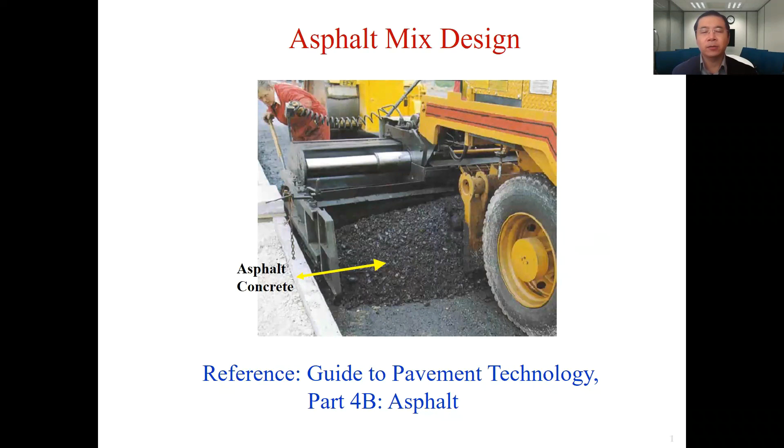From this week, I will deliver lectures for the second half of this pavement materials and design unit. I'm going to talk about asphalt mix design, design of the flexible and rigid pavement, and finally, the pavement maintenance. Today's lecture is about asphalt mix design.

Now let's have a look at two important types of pavement structure: flexible pavement and rigid pavement. Flexible pavement is normally composed of a wearing surface, a base, a subbase, and subgrade. The wearing surface, the top layer, is in direct contact with the traffic. It is normally made of asphalt concrete or bituminous concrete. Asphalt mix design is the design of the asphalt concrete wearing course. It is specifically designed to resist abrasion from traffic and to minimize the entry of water. The asphalt wearing surface must also have suitable surface friction properties for adequate skid resistance.

Rigid pavement is normally composed of cement concrete, subbase, and subgrade. We will focus on the asphalt mix design of the flexible pavement in this lecture and discuss rigid pavement in the following lectures.

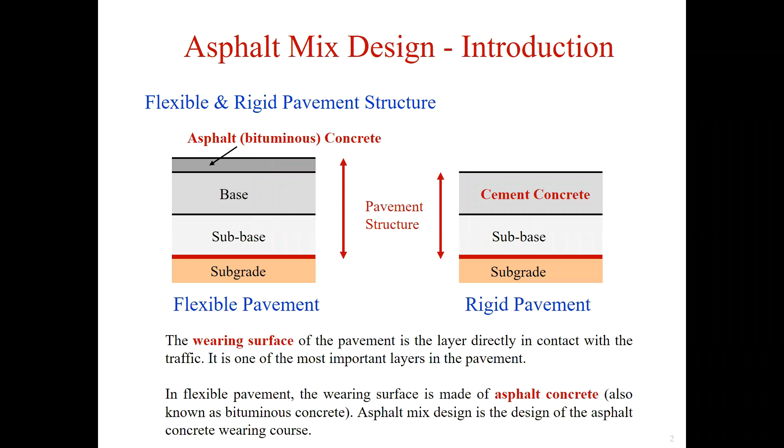For asphalt mix design, normally the guidelines and specifications need to be followed. In Australia, the asphalt mix design is based on the procedures contained in the guidelines of the Australian Asphalt Pavement Association, AAPA, and Australian Road Research Board, ARRB. These guidelines aim to promote good practice in the process of asphalt mix design and improved understanding of the selection of design procedures for particular applications.

In basic terms, asphalt is a mixture of coarse and fine aggregates, mineral filler, and bituminous binder. The asphalt mix design involves the selection of aggregate type and grading, the binder type, and binder content. The aim is to optimize the engineering properties of the asphalt to achieve the required engineering behavior. The basic requirements for asphalt are adequate load carrying capacity, or resistance to deformation, and durability. Specific requirements vary considerably with traffic loading levels, operating environment, and underlying base conditions.

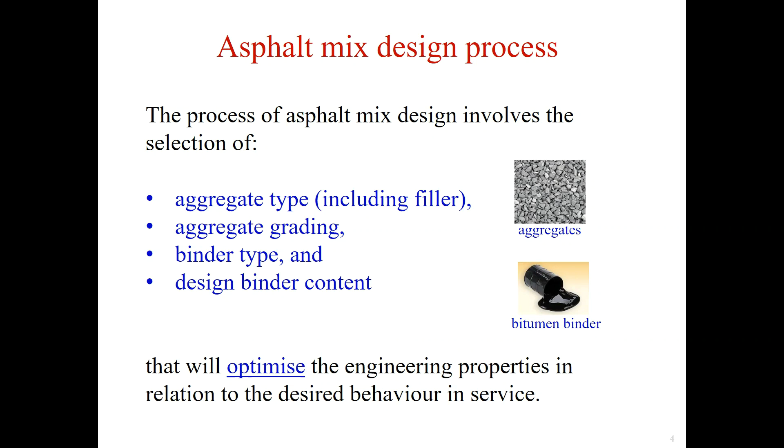For asphalt mix design, certain performance-based design criteria must be met. Here we have key performance indicators: deformation resistance, fatigue resistance, durability, and moisture sensitivity, which will be discussed in detail in the next slide.

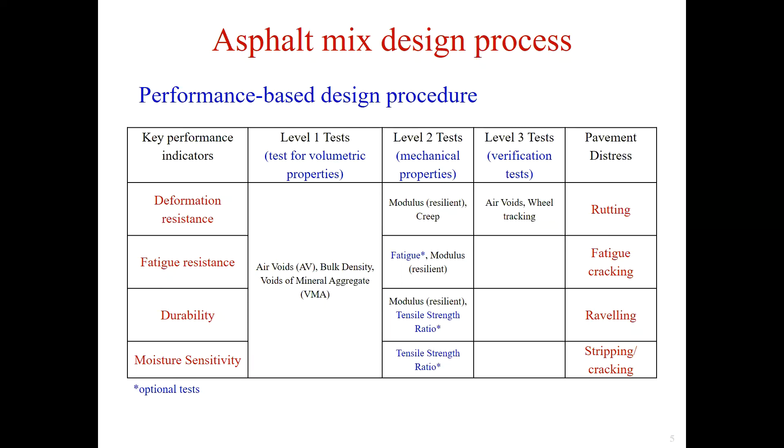There are three levels of tests. Level 1 tests are for checking the volumetric properties. Level 2 tests are for obtaining mechanical properties, while level 3 tests are verification tests. If these key performance indicators could not be met, then different types of pavement distress would occur, like rutting, fatigue cracking, raveling, and stripping.

Now let's go back to see these performance indicators and corresponding distress. If there's no sufficient deformation resistance, then rutting would occur, which shows surface depression in the wheel path. One of the main reasons of rutting is improper mix design or manufacture. For example, excessively high asphalt content, excessive inert filler, or insufficient amount of angular aggregate particles.

There is also fatigue cracking due to insufficient fatigue resistance. By the way, fatigue is the weakening of a material caused by cyclic loading that results in progressive and localized structural damage and the growth of cracks. The fatigue behavior of an asphalt layer depends not only on the properties of the mix, but also on the structural properties of the underlying pavement layers, the traffic, and climate conditions.

Durability and moisture sensitivity are another two performance indicators, and the corresponding issues are raveling and stripping of the wearing surface. Raveling is the progressive disintegration of a pavement surface through loss of both binder and aggregate. Asphalt stripping is essentially asphalt raveling in reverse. So instead of the surface coming apart, disintegrating and exposing the lower layers, the asphalt falls apart first and damages the upper layers.

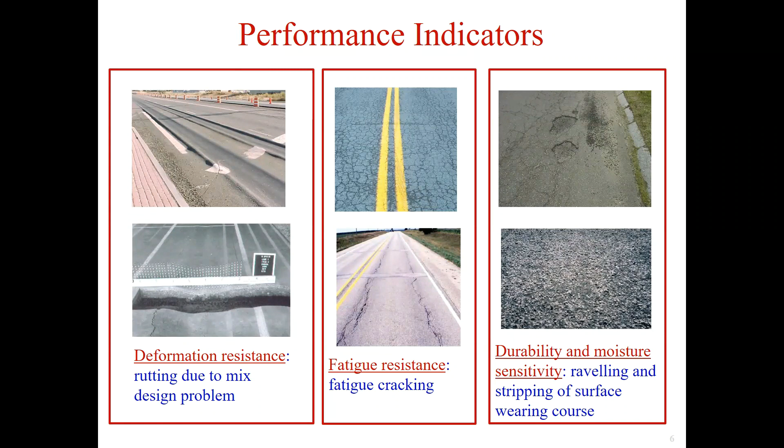Asphalt mix design involves the following 9 steps. Initially, we need to select the mix type, then the component materials. Selection of mix type for particular performance conditions will set the parameters for aggregate grading, the binder type, volumetric properties, and the general performance characteristics of the mix.

Afterwards is combining aggregates to meet target grading. Then select trial binder content and range, and mix, condition, and compact asphalt mix to simulate field condition. The 6th step is to determine the volumetric properties of the compacted mix and select design bitumen content.

Step 2 to 6 belongs to level 1 testing. Step 7 is the mechanical testing, or level 2 testing. Step 8 is the verification test, or level 3 test, to check the air voids or wheel tracking results of the asphalt samples.

Finally, step 9 is the selection of job mix. The job mix will nominate the type and source of components, target grading, the binder content, and volumetric properties of the mix.

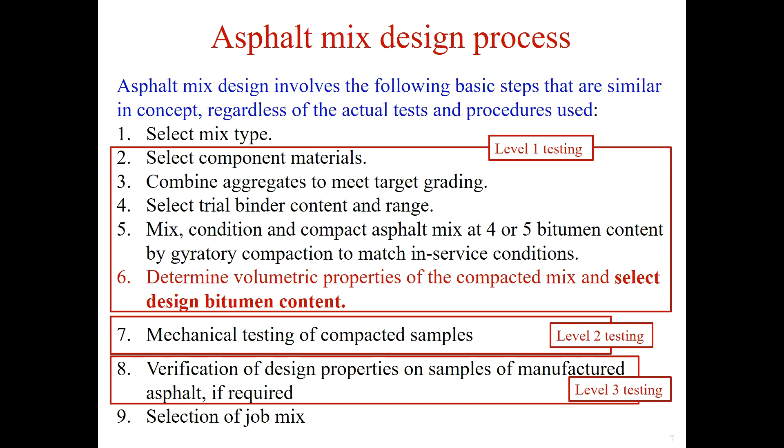This is the flow chart of the 3 levels of the Austroads mix design procedure. We will go through the details of this design process in the following part of this lecture.

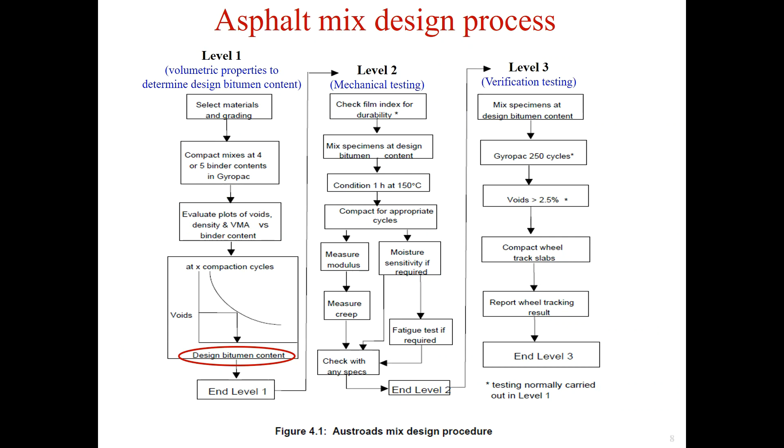Now let's have a look at the details of each slide.

In basic terms, asphalt is a mixture of coarse and fine aggregates, the filler, and bituminous binder. There are mainly 4 asphalt types: dense graded, open graded, stone mastic, and fine gap graded. The most common type of asphalt is a dense graded mixture. This is the focus of our lecture.

A dense graded asphalt mix has a continuous distribution of aggregate particle size and filler, and a low design air void content, generally in the range of 3 to 7%.

The open graded asphalt is characterized by a large proportion of coarse aggregates and only small amounts of fine aggregate and filler. Due to large voids, its usage can lead to reduced noise and reduced surface water and spraying.

The stone mastic asphalt is also a gap graded mix, but with a high proportion of coarse aggregate, providing an interlocking stone-on-stone skeleton that resists permanent deformation. Generally, it has high durability and high rut resistance.

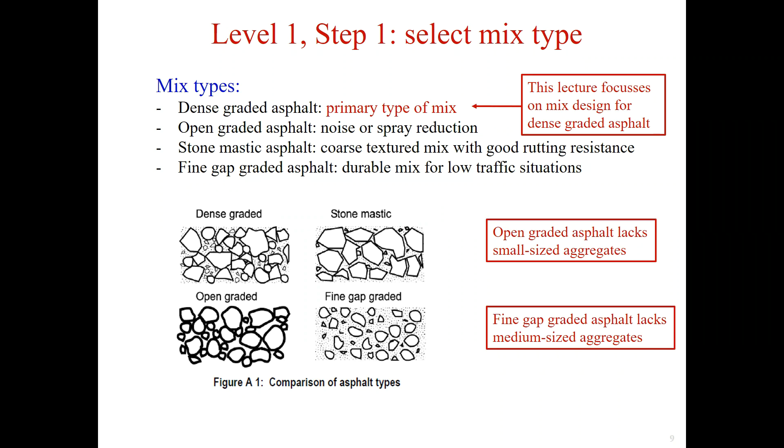The dense graded asphalt is most popular used in the field. It could be used for strengthening or correcting irregularities, or even fixing an existing pavement, constructing a new pavement, or improving the surface properties and the wearing surface of existing and new pavements. So surely this dense graded asphalt has multiple applications, and it is the main focus of our unit.

The other mix types, like open graded, stone mastic, and fine gap graded asphalt, are mainly used for the pavement to meet any special requirement.

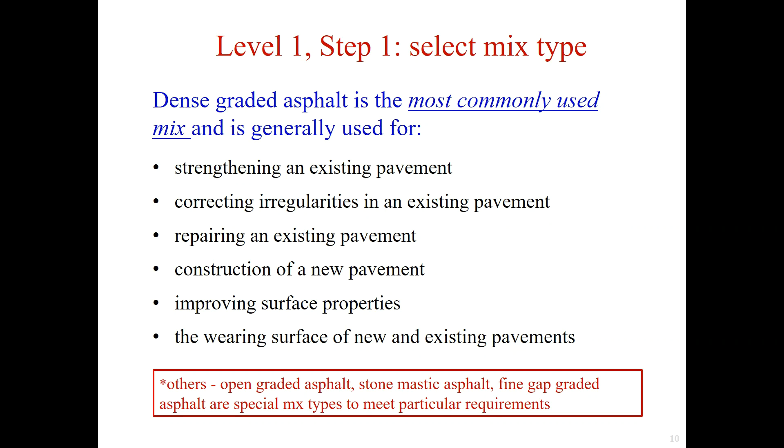Step 2 is to select component materials. The principal factors influencing the performance characteristics of asphalt mixes are the selection and quality of components and the volumetric properties of the mix, like nominal size, the grading, the binder content, and void relationships.

The selection for binder depends on the environmental conditions, such as temperature and traffic, and property requirement of the asphalt. The binders for asphalt manufacture mainly contain two groups: the conventional and modified bitumen binders. There are two types of modified bitumen binders: the multi-grade binder and polymer modified binder. Now let's look at the details of each type of the binder.

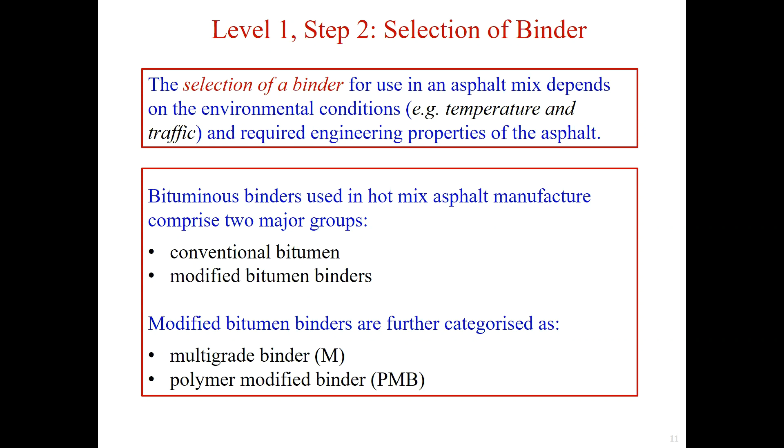The most commonly used bituminous binder in Australia is the conventional bitumen. According to its viscosity at 60 degrees, the conventional bitumen could be divided into three major grades: class 170, class 320, and class 600. By the way, the viscosity of the bitumen is a measure of its resistance to deformation at a given rate.

The softer grade, like class 170, is good at resisting fatigue and cracking due to its flexibility and durability. So it is typically used for light traffic and in cool climates.

The harder grade, like class 600, is good at resisting rutting or deformation of the pavement, so it is generally used for pavement with heavy duty. The medium grade class 320 has good resistance to rutting while maintaining flexibility and durability, so it is the most versatile and commonly used type of binder.

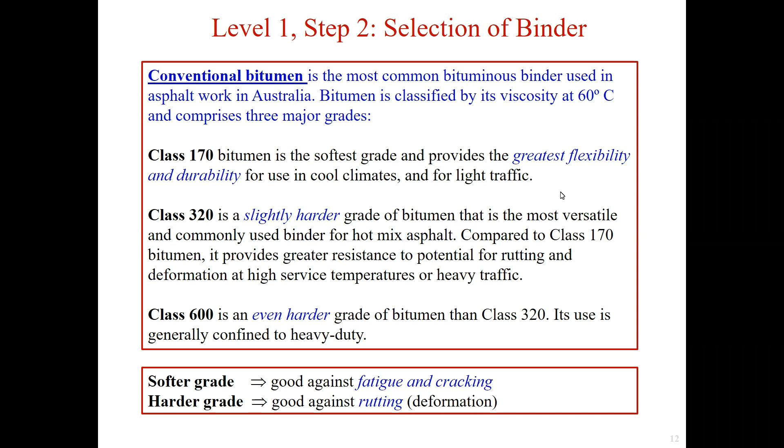Now let's look at the modified bitumen binder. Compared to standard bitumen grades, the multi-grade bitumen is less susceptible to temperature change, so it can provide improved deformation resistance at high surface temperature, while retaining the desired level of flexibility at low temperature.

The polymer modified binder is adding the polymer to increase binder toughness and elasticity. Toughness is the ability of a material to absorb energy and plastically deform without fracturing.

The polymer modified binders are normally used to enhance the properties of bituminous binders, to improve performance on heavily trafficked pavement surfaces, or provide greater flexibility. Its good performance includes improved flexibility, cohesion, and resistance to deformation of asphalt mix at high temperature.

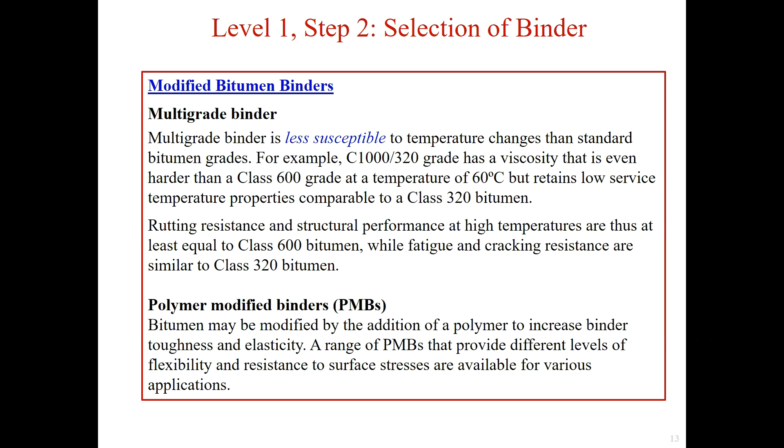According to different application purposes and different climates in the area, we can choose different types of binder, from class 170 to class 320, and either multi-grade binder or polymer modified binder. For example, if it is intended to be used for residential driveways in a moderate climate, then we need to use C170 or C320 as binder material.

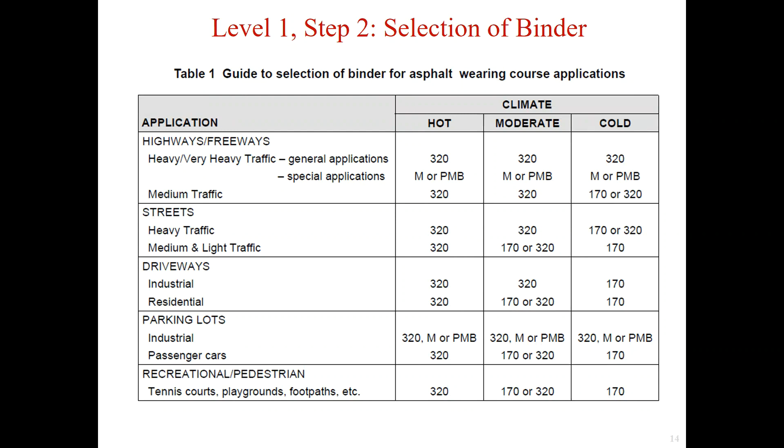We already learned the selection of binder in step 2. For step 2, we also need to select the aggregates. The nominal size of the aggregate could be determined as a function of the layer thickness, or the layer thickness could be selected on the basis of the nominal size required for a particular application.

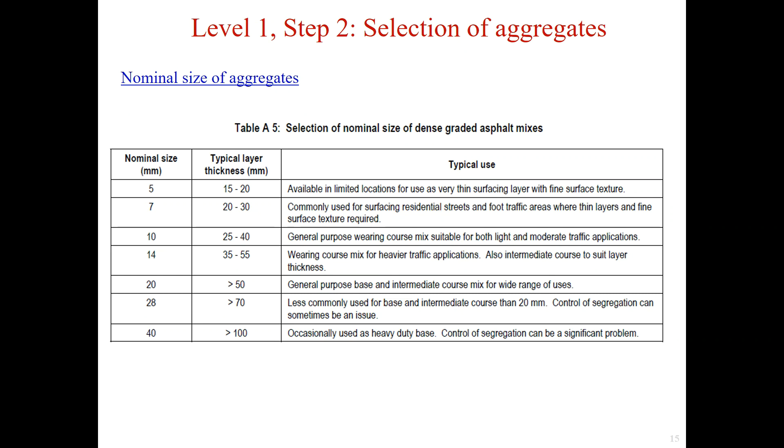A guide to selection of layer thickness and nominal size is shown in the table here. For example, if the nominal size of the dense graded asphalt mix is 40 millimeter, then the layer thickness has to be greater than 100 millimeter.

Step 3 is to combine aggregates to meet target grading. The target grading has to meet the grading envelope requirement. In general, the grading envelope is the particle size distribution of the aggregate.

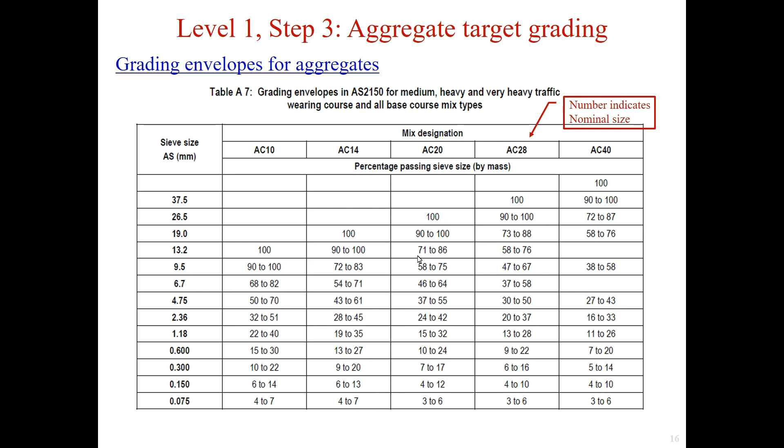When we plot the data in log scale, where the horizontal axis is the sieve size in log scale, and the vertical axis is the percentage of passing, here is how the grading envelope looks like.

According to the previous table, for AC14, we could plot the upper bound and lower bound curve, and normally the target grading falls in between them.

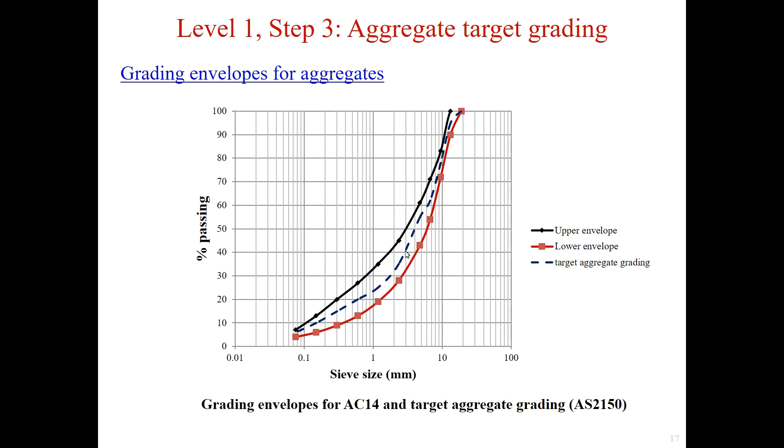A target grading may also be chosen from empirical formula. Most engineers will work from standard grading curves, such as those given in the previous table. It is possible to work from a design formula, such as that of Fuller and Thompson equation.

So P equals 100 times D divided by capital D to the power of N. In this formula, capital P is the total percentage passing a given size. If we know the size of the sieve D, the maximum particle size capital D, and the exponent, it could be taken as the value in between 0.4 and 0.7 to stand for boundary values.

Then the percentage by mass of aggregate passing a given sieve, capital P, could be calculated. This equation produces the maximum particle density when we take N as 0.5.

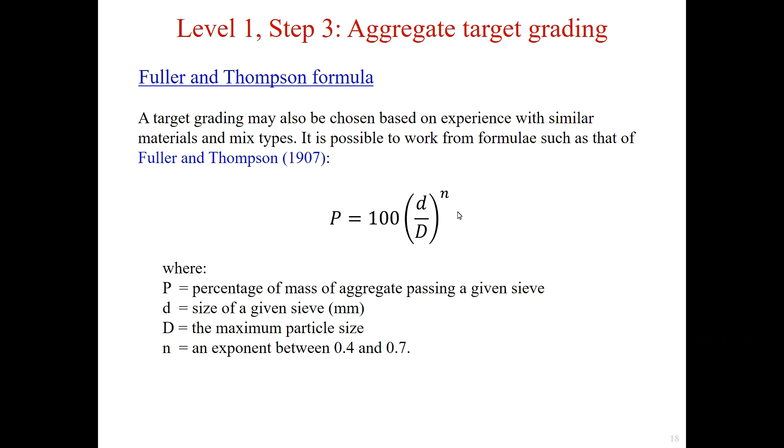In this unit, we have the opportunity to conduct lab testing on pavement materials. If you have done the lab testing, then here is the lab sheet you need to fill in.

You could use the Fuller and Thompson formula to calculate the target grading, and then work out the values for all three samples with bitumen content of 4% to 6%. We will practice one example by the end of this lecture.

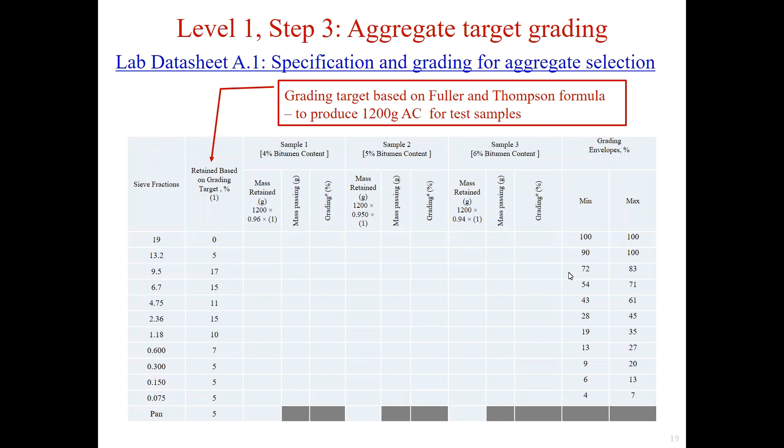We could also work out the proportion of combined coarse aggregate PC, the proportion of combined fine aggregate PF, proportion of filler PFill, and bitumen content capital B. Be aware that PC is for coarse aggregate with particle size equal or greater than 4.75 millimeter.

PF is for fine aggregate with size less than 4.75 millimeter but equal or greater than 75 micrometer, and PFill is for filler with size less than 75 micrometer.

For example, for sample 1, the bitumen could be calculated as the total mass of 1,200 grams times 4%, and we get the value of 48 grams.

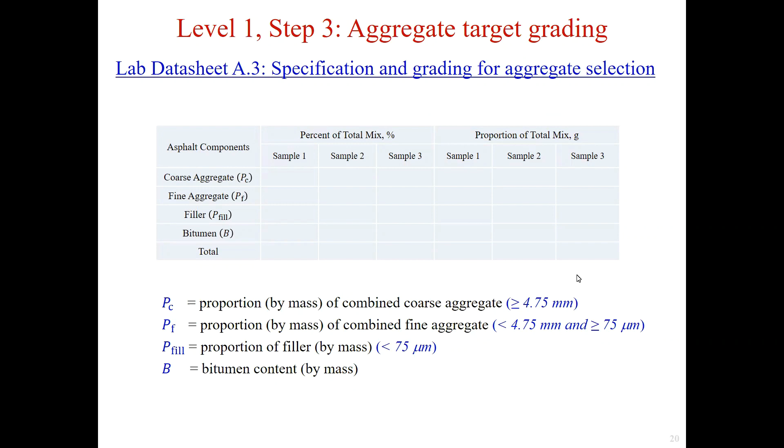Next step is to select a trial binder content on the basis of past experience, or to make sure to meet the requirement of minimum binder film index of 7.5 micrometer or greater.

The binder film index is a measure of the average binder film on the aggregate particles, excluding any binder which might be absorbed by the aggregate. This allows the mix to have adequate durability and fatigue resistance.

Normally, the binder film index gives the minimum binder content, and the trial binder content will normally be 0.5% higher than this. By using the trial bitumen content and the trial plus and minus 0.5% and 1%, we're able to get a range of bitumen contents.

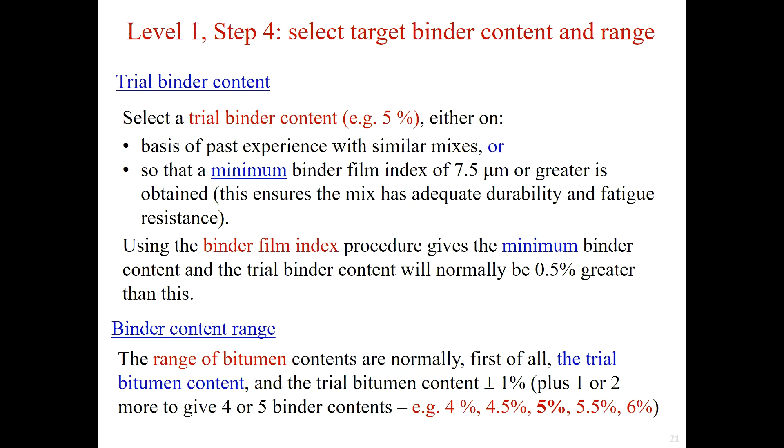Once the trial binder content is chosen, we start to mix and then condition and compact the asphalt mix in step 5. We need to ensure the sample prepared in the lab has properties as close as possible to asphalt placed in the road, and this is an important aim of the asphalt mix design procedure.

As discussed before, class 320 bitumen is commonly used in asphalt for medium and heavily trafficked mixes, so we will choose it for mixing. The mixing is conducted for a range of bitumen content, normally between 4% and 6%.

The aggregate and binder are heated in an oven and mixed at 150 degrees. The mix is then transferred to an oven and conditioned under 150 degrees for 1 hour.

It simulates the hardening of the binder during manufacture, placing of the mix, and the initial service period. In such case, the prepared sample could reflect the real behavior of the field pavement.

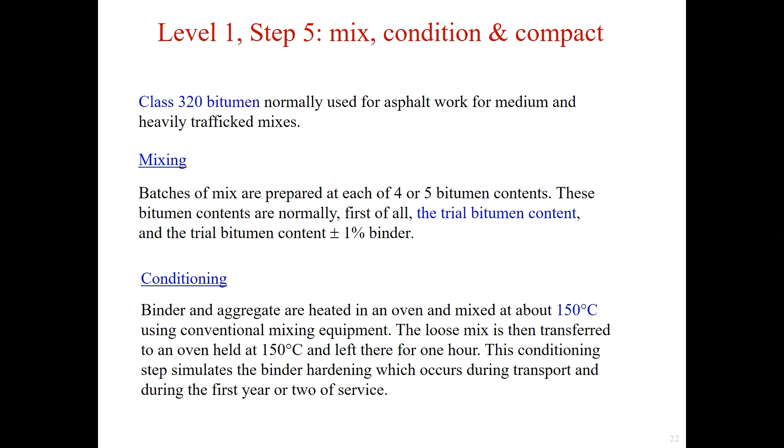For the compaction of the sample, the gyratory compactor is used to compact the samples for the required number of cycles. The compactor could produce 100 millimeter and 150 millimeter diameter cylindrical asphalt samples of specified density.

The applied shear force to the asphalt mix is similar to that from the roller during the construction of the road.

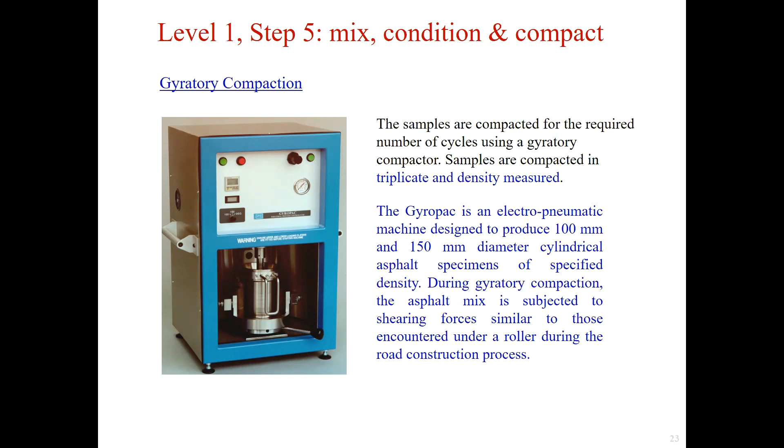So the vertical compressive pressure is applied to the asphalt sample within the mold. The produced samples have mixed characteristics very close to those found in the field pavement.

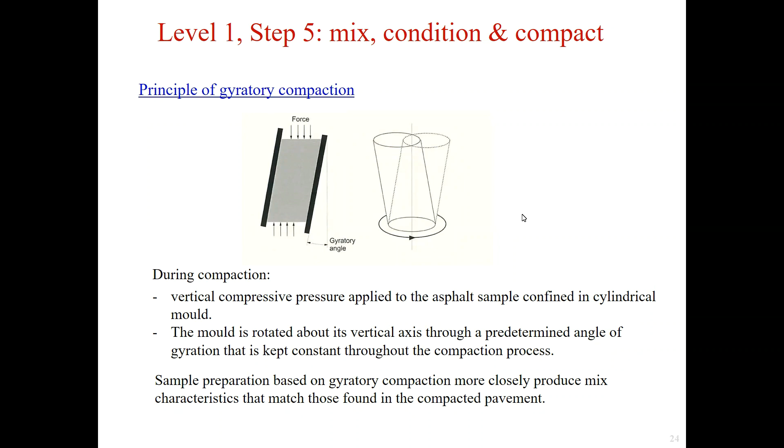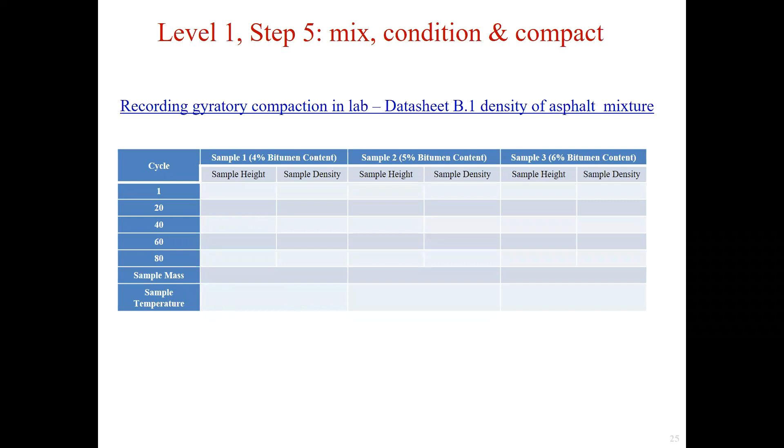Step 6 is to determine the volumetric properties to select design bitumen content. Let's have a look at the volumetric relationship.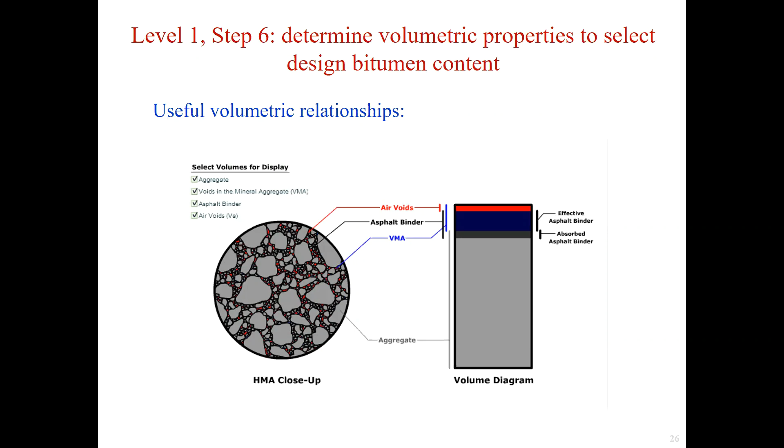If the relationship is expressed in terms of mass or volume, here's how the composition looks. If we look at mass, normally the air voids have no weight. The binder is expressed as capital B, BE stands for the effective binder, and small b for absorbed binder.

From a volume point of view, AV is the volume of air voids, and VB is the effective volume of the bitumen. The sum of them is called VMA, the voids in mineral aggregate. Typical values of VMA in dense mixes can be 13% to 20%, depending on the nominal size of the mix.

Finally, Vg is the volume of the aggregate, including the absorbed binder. I would strongly suggest you pay more attention to these definitions and relationships, as you'll need to use them for some calculations.

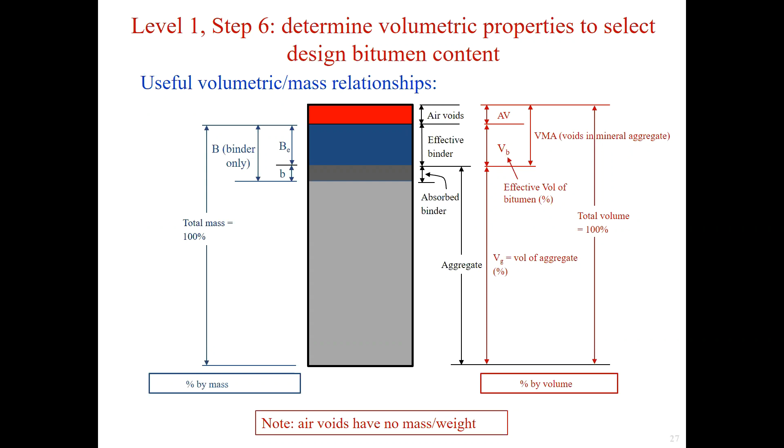Based on the previous figure, we have the following useful volumetric relationships for air void content AV, voids in mineral aggregate VMA, and voids filled with binder VFB. Among these formulas, rho max is the maximum density of asphalt in tons per cubic meter.

The rho bulk is the bulk density of asphalt in tons per cubic meter. Capital B is the proportion by mass of binder in total mix. Rho B is the density of binder in tons per cubic meter. Finally, rho A is the bulk density of the combined mineral aggregates in tons per cubic meter.

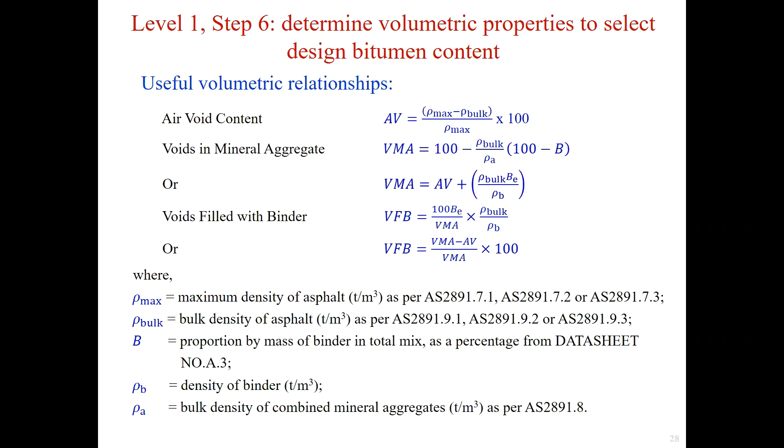This is the follow-up of the previous slide. The bulk density of the combined mineral aggregates could be calculated using this formula. The physical meaning of each symbol is shown below.

BE is the proportion by mass of the effective binder as a percentage, which can be obtained from the following equation. The small b is the proportion by mass of the binder absorbed as a percentage. It could be calculated from the bottom equation.

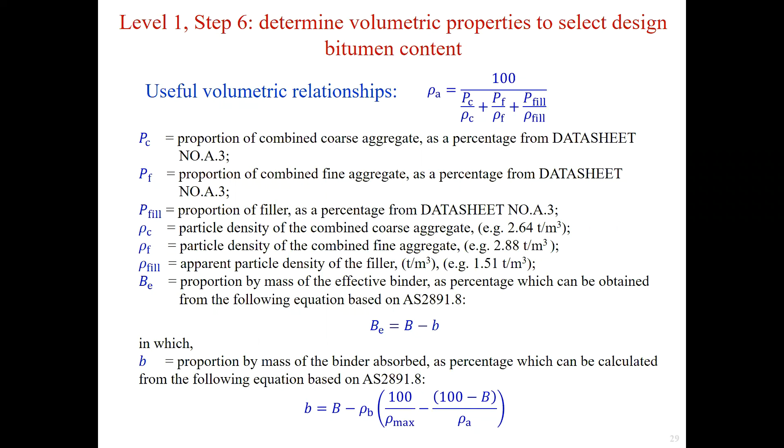After you conduct the lab testing, you should be able to obtain the measured values for datasheet C.1 and D.1. The maximum density of asphalt, or rho max, could be obtained by the combination of the table and the formula below, where M1 to M5 are the testing measurements.

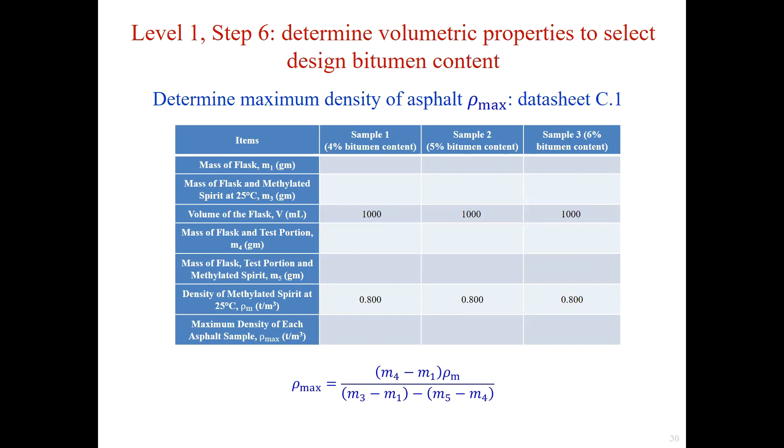Similarly, the bulk density of asphalt could be calculated based on datasheet D1 and the formula below, where M1 to M3 are the testing measurements in the table, and rho W is the density of water in tons per cubic meter.

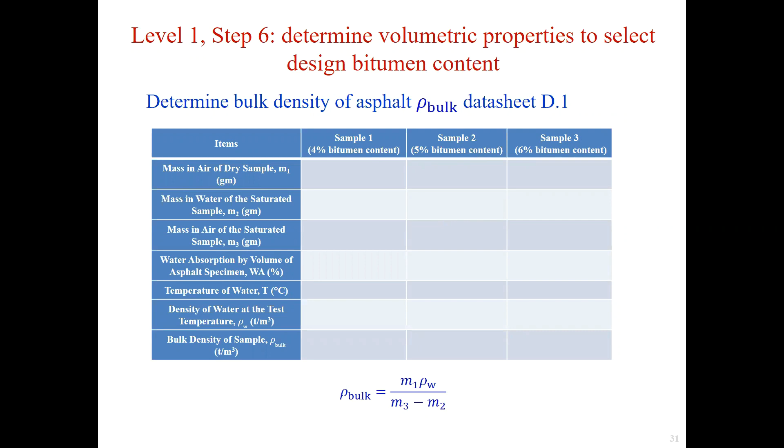After we conducted tests on samples of 5 different bitumen contents, we are able to get the relationship plot of air voids, density, and VMA, or voids in mineral aggregate, of the compacted samples versus bitumen content. They could be used to evaluate whether the mix meets any required specifications.

If the mix has the required air void content, then the binder content could be determined from the plot. For example, if an air void of 5% is required, then according to the first figure, the design bitumen content is chosen as 4.8%.

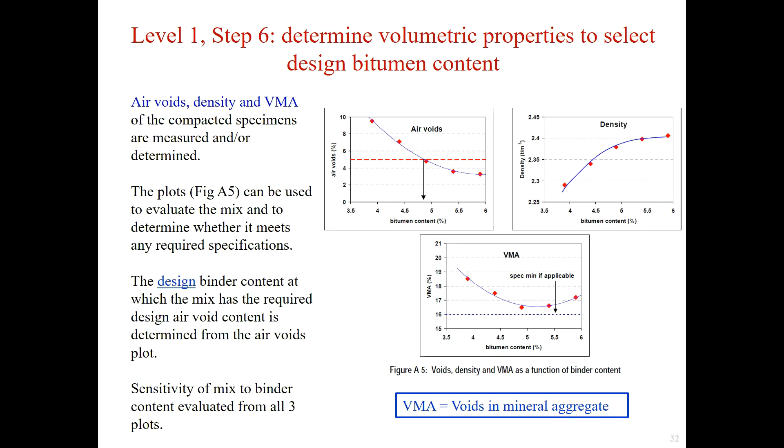Also, we could check the sensitivity of the asphalt mix in terms of these parameters to binder content from these figures. For example, if the bitumen content was increased from 4.5% to 5%, how do the air voids, the density, and VMA change accordingly.

Step 7 is the mechanical testing to get a series of properties such as the film index, resilient modulus, and creep. There are two operational tests: moisture susceptibility and beam fatigue resistance. These tests are only for medium to very heavily trafficked roads.

Ideally, the mechanical properties of asphalt in situ are required for pavement design purposes. Reproduction of in situ stress conditions in the lab is difficult, so these simplified tests are introduced to indicate certain aspects of the in situ behavior.

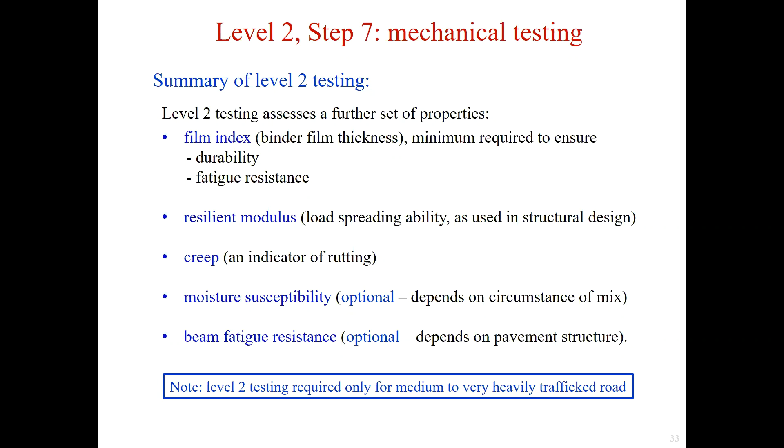The relationships of these properties with binder content are shown in these figures. We can see that the testing is performed at a single trial binder content of 5%. If the requirement from the specification or guideline is not met, we could adjust the trial binder content by plus or minus 0.5% or 1% and prepare a new mix until the requirement is properly met.

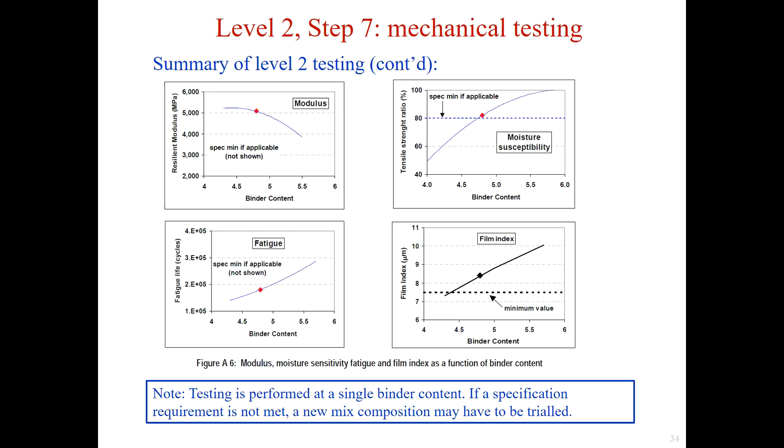In previous slides, we discussed level 1 and level 2 testing. Level 3 testing is the testing for verification. It is only required for heavily trafficked roads or where extra reliability in terms of rutting performance is required. It has two parts: the check of the air voids using a gyratory compactor at 250 cycles, and wheel tracking of the asphalt slabs.

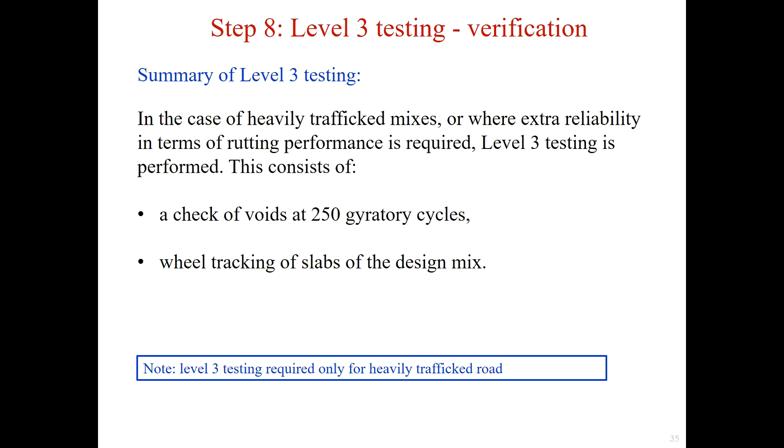Let's look at air voids verification test first. The air void content of a mix affects the stability and durability. Experience indicates that asphalt mixes with air void content less than 2 to 3% are likely to be unstable and prone to rutting, because the binder almost totally fills the void spaces and reduces aggregate particle interlock and friction. The specification requires the mix with a design air void content of 5% must have greater or equal to 3% voids at 250 cycles.

A mix with design voids of 4% would need to have greater or equal to 2% voids at 250 cycles. We could take measurement, work out the air void at 250 cycles, and check if it meets the above requirement. This air void check is normally done during the level 1 testing.

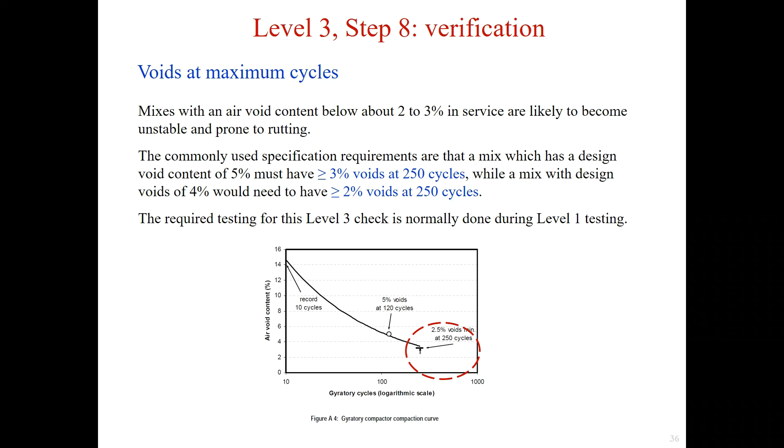The wheel tracking test is the asphalt slab repeatedly traversed by a loaded wheel to correlate to road performance, as shown here. It is used to measure the deformation resistance and is widely accepted in a number of countries. For wheel tracking, normally a 300 millimeter square slab with 50 millimeter or 75 millimeter depth is made from the asphalt mix. The corresponding air voids of the slabs must be 5 plus or minus 0.5% to get a characteristic value.

The test is normally carried out at 60 degrees using a wheel of 50 millimeter width and 200 millimeter diameter, with top load generating pressure of 700 kPa. The results are expressed in terms of wheel tracking rate or final tracking depth. You can watch a wheel tracking test demonstration through the link below.

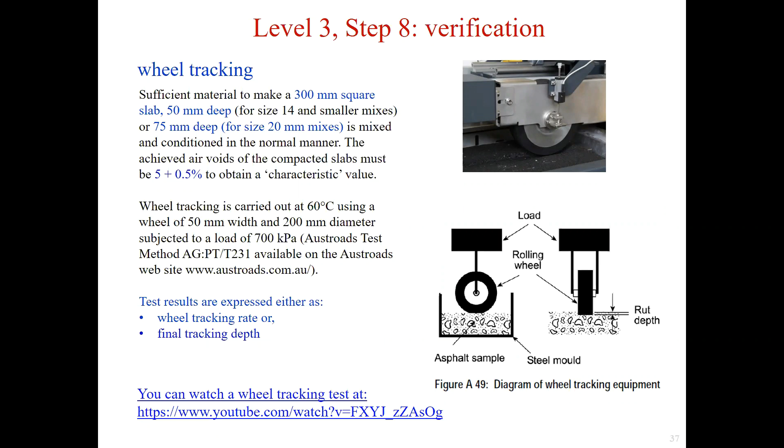The wheel tracking test is stopped either when 10,000 passes have been completed or the tracking depth is greater than 15 millimeter. For the parameter of wheel tracking rate, it is calculated as the change in tracking depth with the number of passes over the range of 4,000 to 10,000 passes. The result could be converted and expressed as the final tracking depth after 10,000 passes.

Although the tracking rate is commonly used overseas, it is not considered here. The tracking depth after 10,000 passes is a more appropriate parameter to indicate the asphalt performance. Some typical tracking depths for laboratory prepared asphalt samples are shown in the table below. So if the tracking depth is 3 millimeter, it indicates superior performance. Otherwise, 14 millimeter indicates low performance.

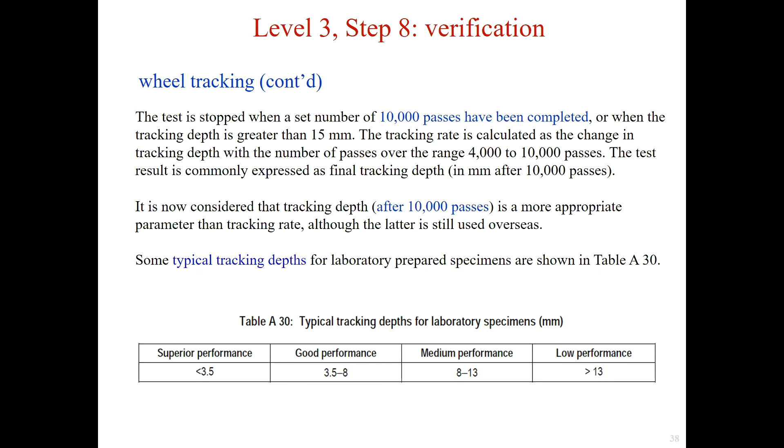For aggregate grading calculation, we could have a better understanding of the calculation process from the example in tutorial 6. In this table, we have 3 samples with bitumen content of 4%, 5%, and 6%. The sample weight is 1,200 grams. So for 4% bitumen content, the weight of bitumen is 48 grams, and the total weight of aggregate is 1,200 minus 48 equal to 1,152 grams.

The upper and lower bound grading envelope values are shown in the last 2 columns. The calculated grading ought to be bounded by these values. The first column is the sieve size, and the second column is the percentage of weight retained based on grading target from the Fuller and Thompson formula. Normally, the first 2 columns and the last 2 columns are given. For sample 1, firstly we need to work out the mass retained.

Using 1,200 grams times 96%, or 0.96, times the values in column 2. The mass passing is the mass of the aggregate minus the retained mass from each sieve. Finally, the grading is calculated using the passing mass divided by the mass of the aggregate, 1,152 grams. We could do the same way and complete the table for different bitumen content.

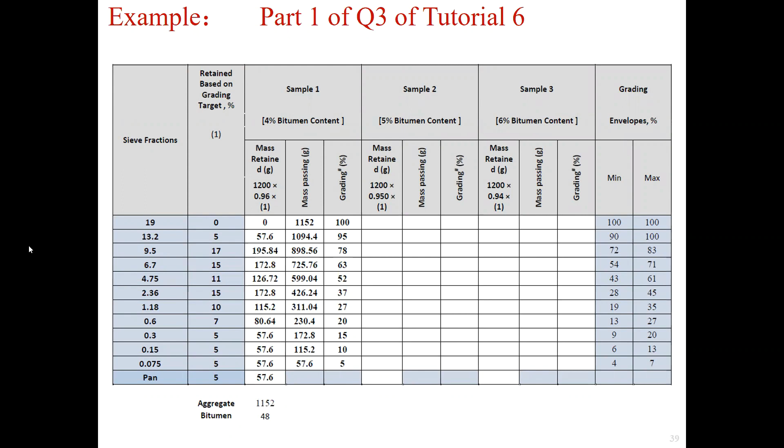So if we go back to the previous slide, the total weight of aggregate is 1,152 grams, and the mass passing the 4.75 millimeter sieve is 599.04 grams. So the weight of coarse aggregate is 552.96 grams. If we divide this value by the total weight of 1,200 grams, we get the PC value of 46.08 in percentage. Similarly, we could work out the PF and PFill.

For the remaining table, we could make full use of the formulas we learned in this lecture to get all these values.

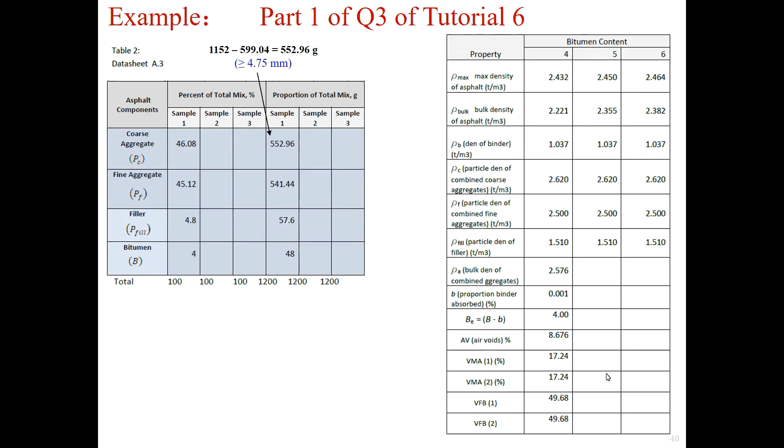All right, a summary of this lecture. The asphalt mix design process has 3 levels and 9 design steps. Level 1 testing is to obtain the volumetric properties. Level 2 testing is the mechanical testing, while level 3 testing is the verification testing.

We learned how to calculate the aggregate gradation and the percentage of coarse aggregates, fine aggregates, and filler for a specific bitumen content. We also learned how to use the formulas to calculate the volumetric properties of the asphalt mix, such as AV, VMA, VFA, and a few other parameters. Finally, according to the specification or requirement, like design air void content, we could determine the design bitumen content from the plots of testing results.